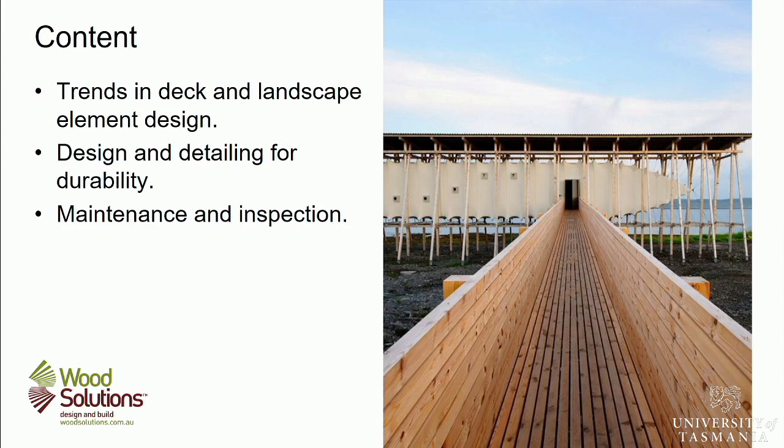On the outside, you then have this quite interesting installation put in right next to the ocean. It's a major landscape installation made with thin timbers, and it's again in quite an aggressive environment in terms of the fixings and fittings that have gone into the building.

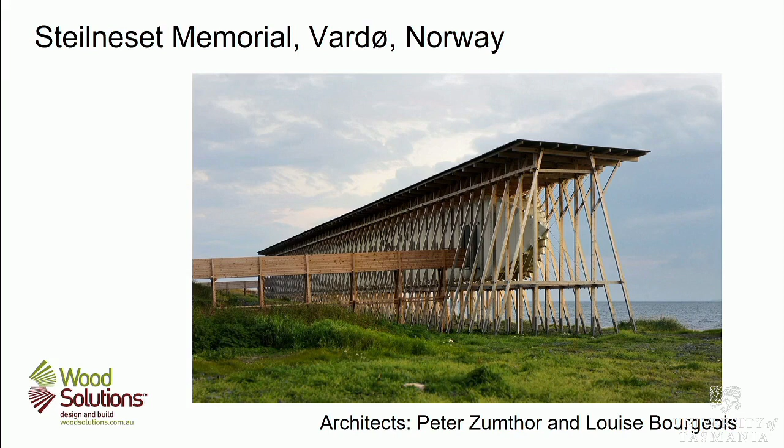They're proposing that the bay here be used for water sports. At the same time, they were encouraging people to re-adopt the old traditions of communal saunas rather than everyone separating and having individual saunas. I think there's some crazy statistic that there's one sauna for every 1.5 people in the country. So inside the building are some public saunas.

Outside of the building has then been converted into what is an outdoor grandstand for watching water sports in the future, plus an area for people to come. There's cafes there and walkways and promenades. Now, all of this is made out of the local softwoods, but it's all been heat treated.

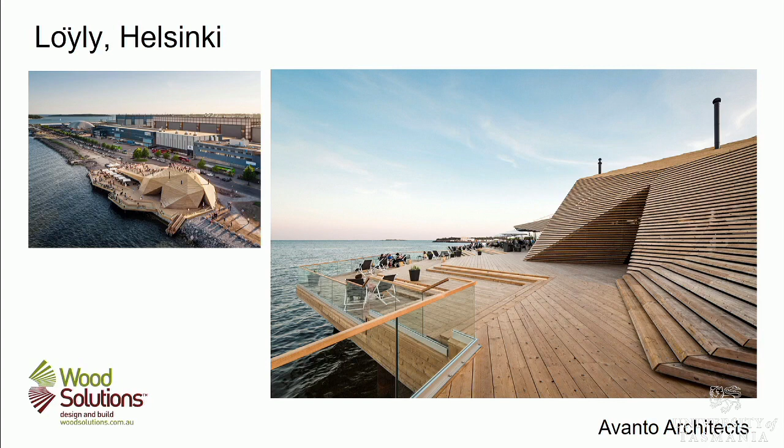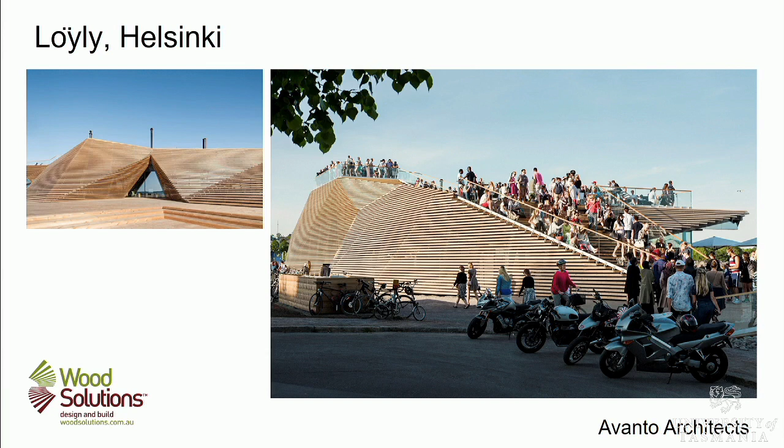I don't have pictures of the inside, but we do have some of the outside. This is it actually being used for a little festival, people sitting on it, using it as a recreational area on a warm day. It probably faces south so that it faces into the sun, and people go up there and sun themselves.

This is a much more robust US example of the change of an old industrial area into something more residential, allowing for greater interaction with the communities. This is an old industrial area in New York where a railway line and a road ran across in between the buildings. All of that's been decommissioned, and parts of it have been cut off so only certain sections now exist.

They've been converted into gardens and walks. In approaching the garden and walk, they've made a large timber ramp which takes you from street level up onto the railway level, and then provides a whole range of seating locations for people to rest as well as to enable people to get from the bottom to the top.

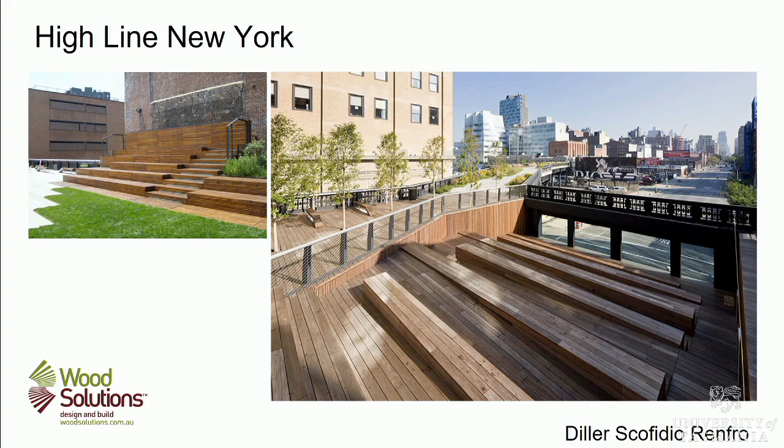You've also got deck areas which incorporate a whole range of seats, and it's worth having a look at those in detail. This is a combination of seats and lights effectively embedded into the deck. They come out of the deck, form a seat, there are lights underneath, and other services have been positioned under them, arranged as a sculptural object.

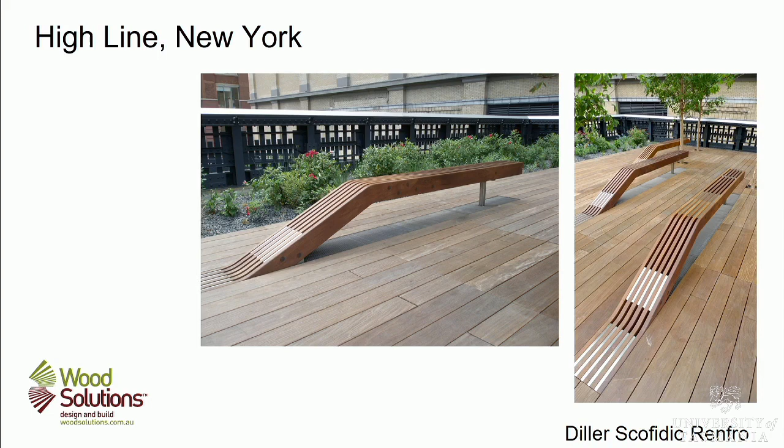This material is obviously all dry, milled board because it has nice clean edges and straight sides. If it was unseasoned material, it wouldn't look so nice and neat and clean and tidy. But they're really quite interesting little pieces - there's obviously services underneath the grids that they can use with the seats.

So if we look now at design and detailing for durability - if you want to start designing things like this, how do we approach it in Australia? The first thing is that anything we want to build is governed by the NCC, the National Construction Code, which governs the design of decks, balconies, and similar landscape structures. There are significant requirements for structural adequacy and provisions like handrails and safety on decks and balconies.

For commercial structures, it's AS 1720. For residential structures, it's designed to AS 1684. Any deck elements we want to talk about in terms of minimum element sizing come from these two codes. In a domestic situation, AS 1684 is where you look up minimum sizes for spans out of the tables, depending on the grade of timber and its treatment. For commercial structures, it needs to be calculated to satisfy the design loads of those structures.

One thing to notice is that the NCC's durability requirements are generally pretty low - they don't have a specific design service life for anything. There is a guidance document, now over 8 to 9 years old, which only gives guidance - it doesn't give you something specific to design to, nor does it prohibit certain practices which may not necessarily be sensible. There's also a whole range of various acts which influence access and equity requirements for people to get onto these facilities.

I want to look specifically at how you're actually going to design a timber one that's durable, to get it to perform over time by selecting the right materials, joining them the right way, and approaching the design in a particular manner. So there's a four-point program.

One is assess the hazard conditions. Then match timber and connections with the hazards for the required service life. Then design for performance and detail to minimise hazards, which means it lasts longer than bad design. And lastly, maintain the item.

Now, it's always embarrassing for me to see really nice timber put in a spot where you know it's going to only have a service life of a very short period of time because of bad design. Not because there's a problem with the wood per se, it's just either put in the wrong spot or used in the wrong way. That's the designer's fault, or the person who made the decision to put it there - it's not necessarily the wood's fault. If you make something out of radiata pine and put it outside, you can't be surprised if it breaks down in 3 or 4 years. It's going to happen, it's just the nature of the beast.

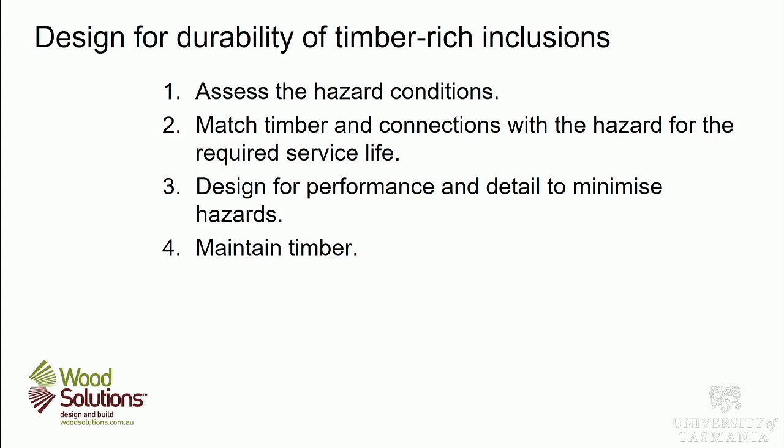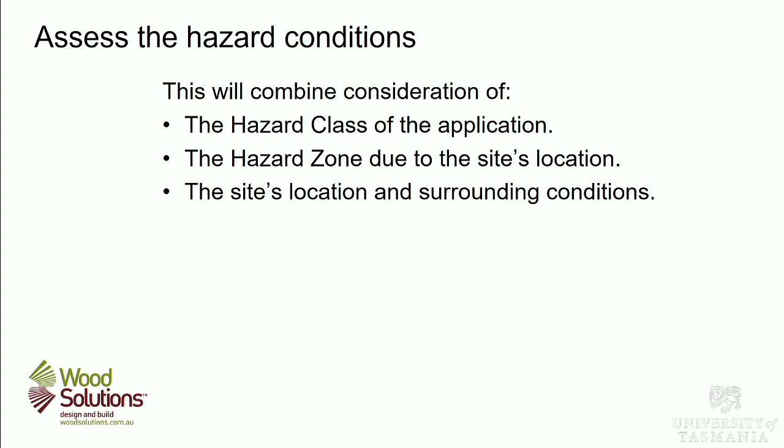Okay, so if we look at the hazard conditions - there's 3 sets of hazard conditions, things that influence what the actual hazard is. The first is the hazard class, a very broad brush approach to problems. The next is the hazard zone, which gives you a bit more discerning arrangement in terms of those hazards. And the next is the site's location and surrounding conditions.

So with wood design, there are 6 accepted hazard classes for applications. They range from H1, the least hazardous, through to H6, the most hazardous. H1 is like in here - these tables, the cladding, furniture, etc. H1 conditions, everything's away from moisture, it's got good airflow, it's unlikely to be a problem.

H2 is basically something that's protected from the weather but may actually be in a wall. So there may be moisture conditions that are going to influence it. There might also be termites and bugs that want to get into it.

H3 is outside above ground. So if we have a deck outside this wall and it's above the concrete, and we have cladding out here, then that's all in H3 conditions - that's what it's known as. H4 is in-ground contact. So if I had a deck out here and it was sitting on the concrete, the material sitting on the concrete is in a H4 condition, because there's water that comes up into it regularly and there's no ventilation around it.

H5 is in-ground contact where you've got extreme conditions or something that's really important. So if you've got a pole frame house, putting the poles down into the ground, that's a H5 condition - you don't want it to fail, so it's structurally important, and it's in the ground in an exposed location. H6 is then immersed in seawater.

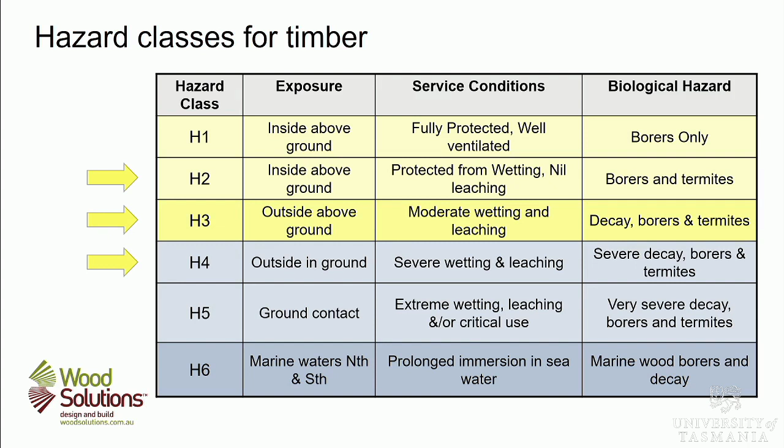So we're particularly looking at between H2 and H4 in this seminar - that's what we're going to find with decks and landscaping arrangements.

So how you differentiate these is - I haven't got a stick - up in here, H1. In the wall frame, on that back deck, H2. The deck's covered, completely covered by a roof, so it's technically H2. Here where it's exposed to the weather, it's H3. Generally you draw a 30-degree line from any shelter, and whatever's inside or outside that line is regarded as H3.

So the cladding on the outside of this is actually in a H2 condition. The cladding at the base of this one's in a H3 - so it will actually get quite completely different conditions. This is obviously in a H4. If we had one of these holding up a large portion of the building, then we'd class it as H5 and treat it accordingly, because it becomes a critical object.

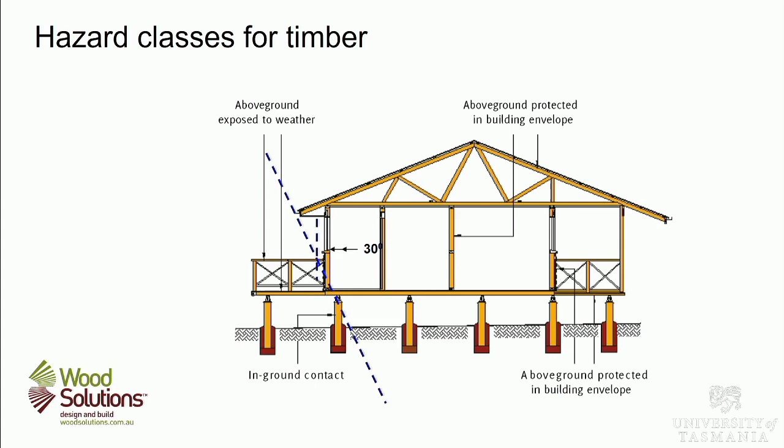So then we have hazard zones. We've dealt with hazard classes in terms of where things are in the building, but it does make a big difference about where the building is. Obviously design in Cairns is different than design in the inner parts of Australia or design in Hobart. Very different conditions in each of those three locations.

So in Hobart or Launceston, the two things we're concerned about: we're going to be quite susceptible to decay above ground, and we're not quite as badly off for decay in ground, but it's something we've got to be careful of at the same time.

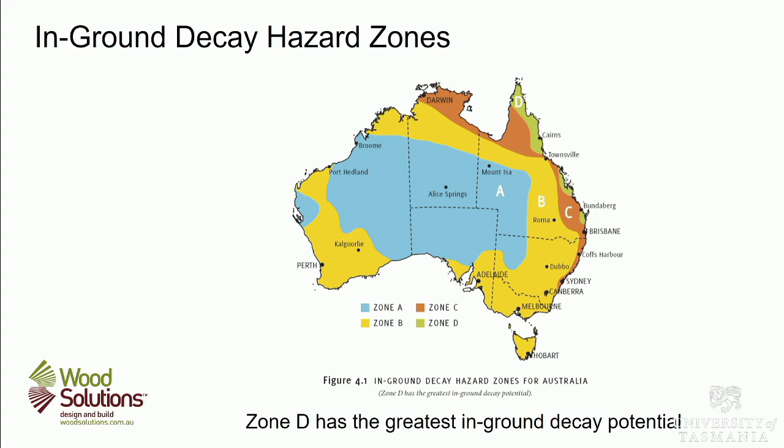There's also a whole range of factors about the building - where it is, what side of the hill it's on, etc. - which make a big difference. Anyone who's grown up in or lived around Tasmania knows that the north-facing slopes, or the south side of valleys, is generally a lot drier than the north faces of valleys, because the north side faces south and the south side faces north. So the north one gets the sun and is much drier than the other. A building on this side of the valley is going to be a lot damper than this one, and it's not going to get as much breeze possibly.

So what you'll find is that decay in this one could well be worse than that one, or decay on one side of a building will be higher than on the other side. Similarly, if you get a lot more sun on the north side, the timber on that side is going to weather a lot more than the timber on the other side. Weathering means all your finishes are going to break down faster, and the timber's going to check more on the surface than the other side.

What about prevailing wind and rain? It does make a difference, but it's basically the moisture you get in the surrounding atmosphere over time that matters. Fungi, which cause decay, need a moisture content in the wood of about 20%, and they need it regularly, otherwise they die off. So if you don't have moisture content over 20%, the fungi won't grow. If you only get it for one week a year, it's not going to decay something out.

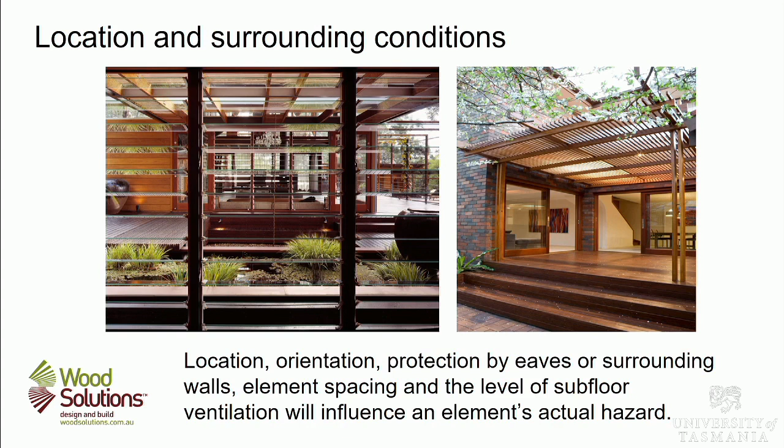This is probably, not so much that one, not so much this one, but certainly this one is the largest source of complaint and failure in decks in Sydney and Melbourne.

So people will want to make a deck, they'll see it on Better Homes and Gardens, here's a deck, this is what we've got to do. So they buy some pine, treated pine, it's got to be good. They pack it on the ground, they put it on some cement, level it all off. Then they will put another batten across, put boards over the top, and then wonder why in 5 years' time the thing starts to break through.

In part, the reason is they've made a swimming pool. And the swimming pool holds all the water in, and that then creates a perfect environment for fungi to grow.

So all of the guidance in Sydney and Melbourne that they give out at the hardware stores is get it up off the ground, get it so that it ventilates. Even to the case where you dig down and make an airspace around the side and leave a space between the ground and drain it properly, if you want to get it right.

But that's obviously a problem, and this is obviously an issue with any timber structure, because all that, as you can see, is leading to decay there at the bottom. So the decay stops once you get that far away, though you might get mould on the surface, but the full decay will stop once you get it dry.

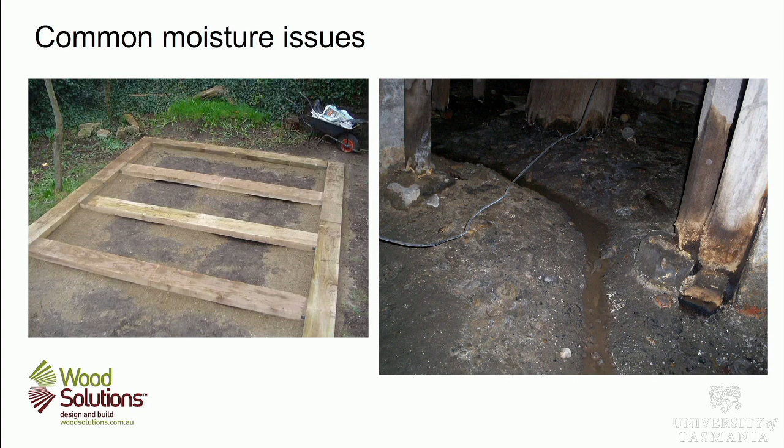Okay, so matching the hazard, matching the timber and the connections with the hazard is in your next deal. So there's a couple of things you've got to consider. One is the natural durability of the heartwood and the material, the treatment of the sapwood, and the selection of durable connections and fixings. Now, I'll just explain what the difference between heartwood and sapwood is.

When a tree grows, it grows generally as a circle in plan, and the outside bit is living cells, and they transport water and nutrients from the leaves to the roots and back again. Okay, so it's a band of certain width. It varies. In hardwoods it's quite small, in pines it's quite big.

Now, as it's moving those sugars and fluids up and down, it's got lots of starches in it. It's also, the cell structures are quite open because you want to move fluid up and down. So that stuff's called sapwood.

The stuff called heartwood is the bit the tree doesn't need anymore to move fluids up and down, and it's the bit in the middle. So the tree pumps waste products from photosynthesis into those cells to toughen them up.

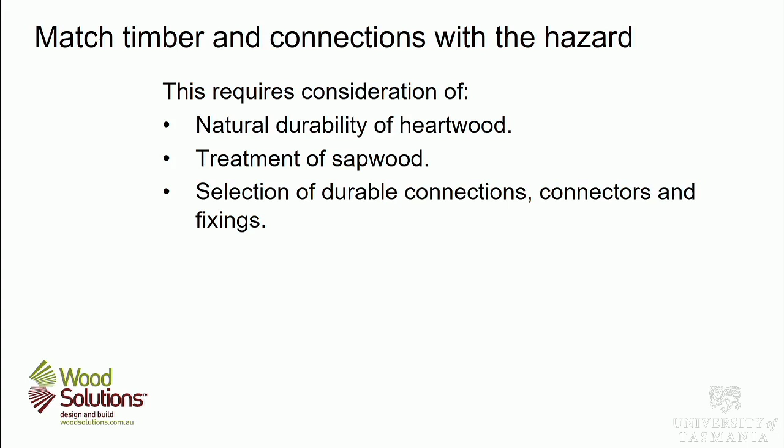Timber resists hazards through its natural durability, and that varies with species. It's a characteristic of the genetics of the tree as to how durable the wood is. Age also plays a part, so the wood from an older tree is likely to be more durable than from a younger tree, even though it's heartwood. Though no one's done the tests, it's just a suspicion.

The difference in durability between heartwood and sapwood is actually quite significant. Also, the structure of the cells makes a difference, because certain bugs like the cells in particular timbers and can't lay their eggs in other timbers. Hardwoods have a large cell called a vessel cell, and our southern hardwoods tend to have big vessel cells. There's a moth that has evolved to lay its egg in those cells, and the larvae grows and eats the sapwood around those pieces. It can't do this with some other species.

All the performance results are listed in this standard, and they're all listed on the Wood Solutions website. So if you want to look up durability, it's on the Wood Solutions site.

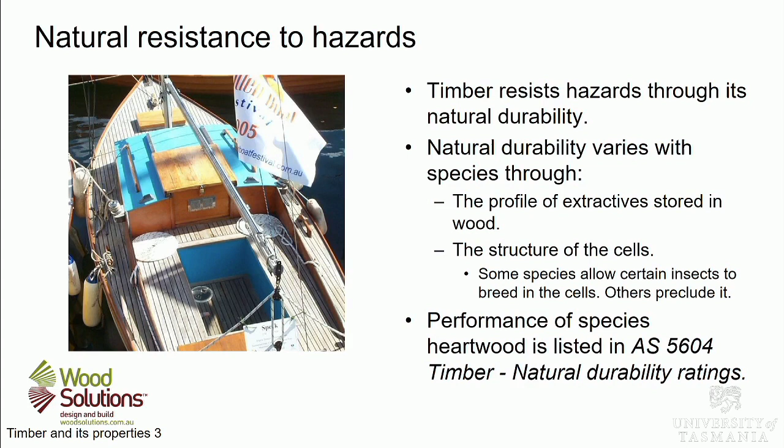Durability is given for in-ground contact, meaning buried, and also outside above ground. This is the result of long tests over 30 to 50 years.

Things are then graded on a 1 to 4 scale, 1 being the best, 4 being the worst. So 1 is highly durable, 2 is durable, 3 is moderately durable, and 4 is low durability. This chart is from research papers giving results of tests from a test site in Sydney of species that are class 1, class 2, class 3 — class 1 being the flattest, lasting the longest with the least decay, up to class 4, which has the most decay in the shortest period of time. So the variability is quite significant.

All sapwoods are class 4.

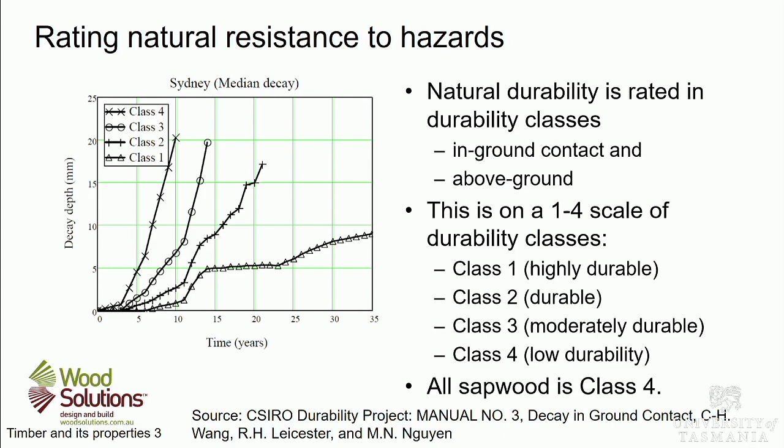This gives you a table of life expectancy for each of those material classes, depending on where you put it. If you've got in-ground, which is an H5 condition, with durability class 1 material, you're expecting greater than 25 years, and it might be significantly longer. Coming down to class 4, you've got between 0 and 5 years in-ground in an H5 condition.

Outside on a deck, you might get 7 years from something that fits this category, such as Vic Ash, or even most Tas oak species, which will only last 7 to 10 years outside. Even in a deck, you'll find that they'll start to decay away. And it will increase up from there.

We did a big project down at the Huon, the Geeveston Forest and Heritage Centre, when I first moved to the state. One thing we did was put in celery top pine mileposts along the Arve Road out towards Tahune. I didn't know much about wood at that stage, having come from Sydney where such things aren't discussed.

The local foresters said, look, we need to sap these things, we need to sap the celery top poles. I said, all right, I wasn't going to argue with them — they were going to do it anyway. So they sapped them, cutting the sap off with axes and adzes, then shaped the signposts and put them along the Arve Road.

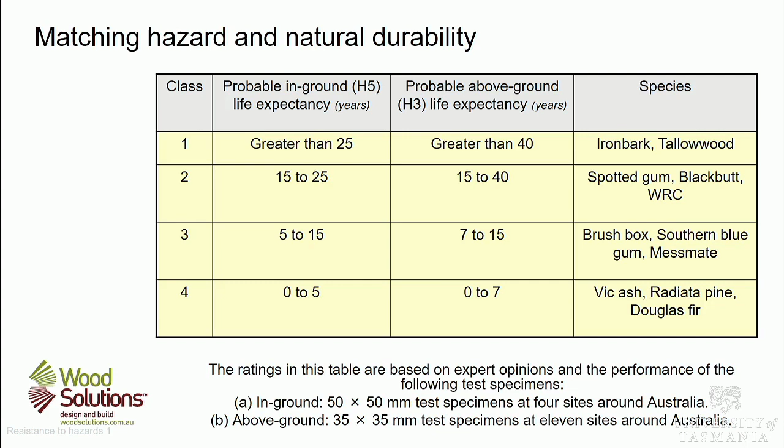If you take the sapwood off, they cannot attack just the heartwood and establish. I'm only mentioning that because A, it shows me in a good light, but B, timber species are really variable in how they perform, and there's a lot of local knowledge that goes along with these things. Different species perform differently, but if you put a piece of sapwood and heartwood out at the same time, decay in one will lead to more rapid decay in the other.

With celery top, can you distinguish between the sapwood and heartwood easily? Yeah, there's a slightly different tone to them. The sapwood is a paler colour, and the inside is slightly more honey coloured.

So with a post you can tell, but in sawn timber I can't tell you if you can. Most sawn timber doesn't actually end up in a deck. It'll end up as painted siding, cladding, or furniture. So celery top is quite hard to lay your hands on now.

This gives you an example of a deck that's probably of a durable species, but you can see here where decay is starting on the corner of the board, and that's due to that being sapwood, while the rest of it's probably heartwood.

We can have that argument later about whether it's upside down - groove up, groove down.

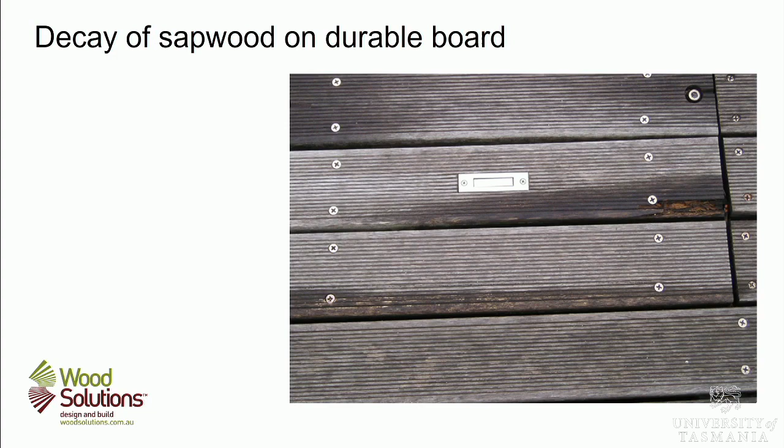I've seen quite a number of cases - there's big decks in Launceston, public decks, where they've specified species, and you'll have a whole line on the edges of boards where it's all decayed away and the other side hasn't. So it can be quite a prominent thing.

One thing you can do with species that are not very durable is treat them. Treating introduces chemicals either onto or into the wood, making it unappetizing for fungi as food. On the mainland you've got to talk about fungi and termites, but here we don't have them yet, so we don't necessarily bring that up. I think they'll come with a fruit fly.

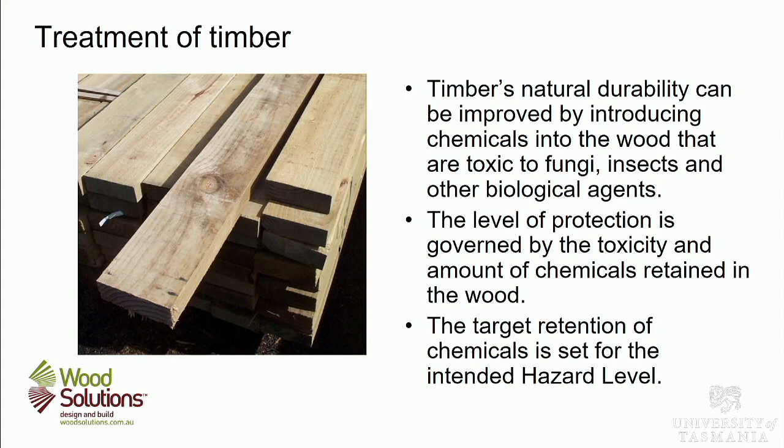With treatment, the level is targeted at the hazard class. So if something's treated to H4, that's the situation it's treated to go into. An H4 treatment means it's suitable for an H4 application or less. If you buy H3 treated material and put it in an H4 condition, it's not going to last very long because it doesn't have enough chemical in there to keep the fungi out, given you've put it in a really nice place to grow. So when you specify, you need to make sure you're specifying the right hazard class material, or checking what you're buying at the hardware store matches.

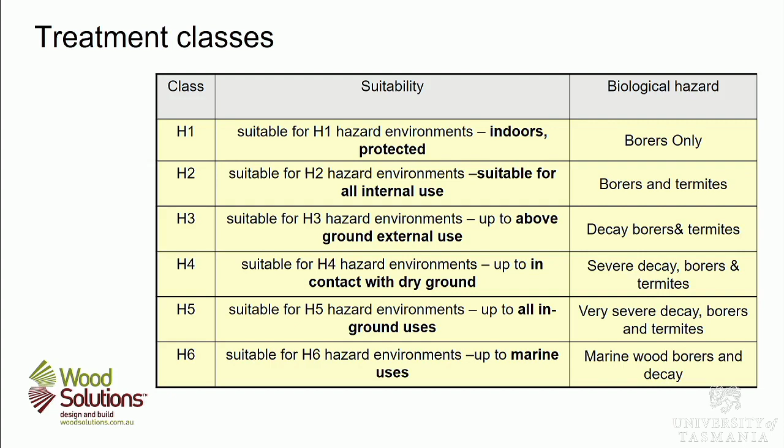There is no direct connection between a durability class and a treatment hazard class. Durability class exists independently of the hazard class of treatment - I'll come back to that, because you can't treat the heartwood of material reliably, or at least you haven't been able to up till now. Some people believe now that you can, that there are certain products developed that will take the treatment into the wood. Others believe that's all just marketing. We don't quite know yet - there hasn't been enough work done.

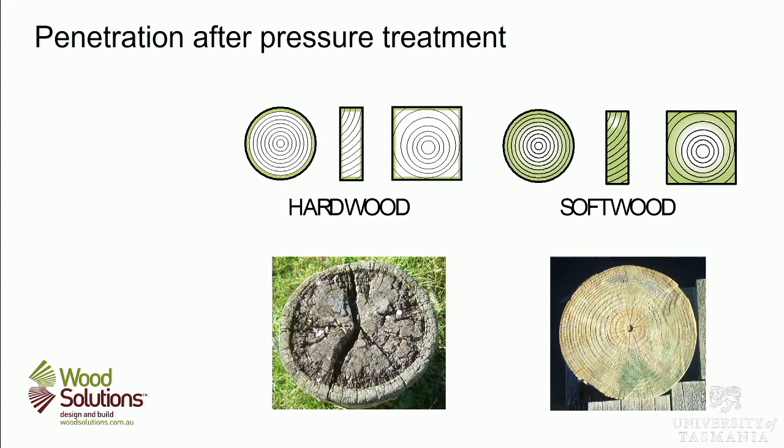So, okay, I think we won't deal with that.

If we're looking at timber outside, for a highly durable case, we're looking for something with a durability class 1 or 2. I'm talking about decks now, outside in the sun, flat, where you're going to get a lot of water. You're looking at durability class 1 or 2 material.

So that's one. The other is silvertop ash, which is Eucalyptus sieberi, only available from the northeast - that's the only place it grows. There are some smaller millers up there who will cut and supply it. If you want to see what it looks like, the deck over here in Sullivan's Cove near the old heritage crane is all done in sieberi. The decking is sieberi.

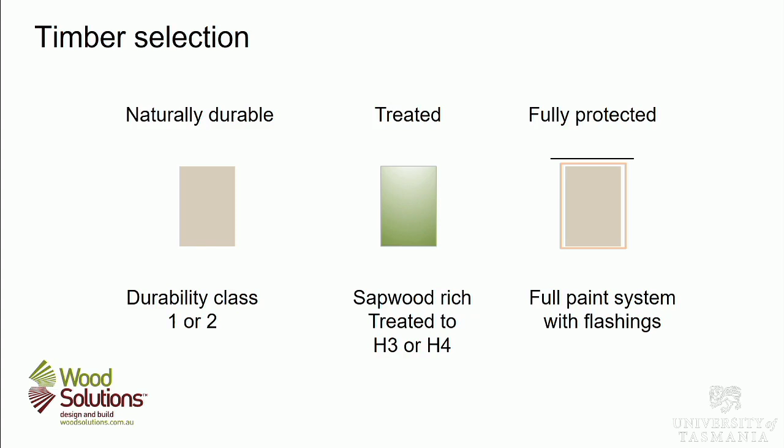The last option is a full paint system with flashing. I've put that in because I've seen the Europeans doing it - this is an example of decks prefabricated by a company in Germany with spruce, where each element is completely coated with paint first, then assembled, and sheet metal flashing is put over the top, adhered onto the timber in locations. The decking then goes on top and is clipped in. After installation it gets a top coat of paint, so it's fully protected from the weather as long as the paint coating stays in place. There are a lot of verandas in Hobart and Launceston that are fully painted and are actually in reasonable condition if they've been continually painted for the life of the building.

It's not... this may not be an acceptable solution, but you can only do that if the client agrees to it as a performance solution.

All right, if we look at that, all right, I'm happy to have a chat about that one.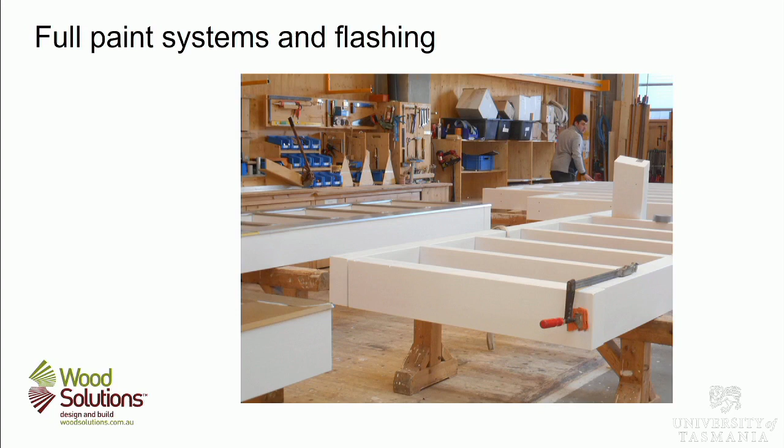So the next item we're after then is durable connectors and fixings. This requires consideration of potential corrosion when it's embedded in the timber, corrosion due to atmosphere, the material used in or protecting the connector and fixing, and the behaviour of the fixing in the timber.

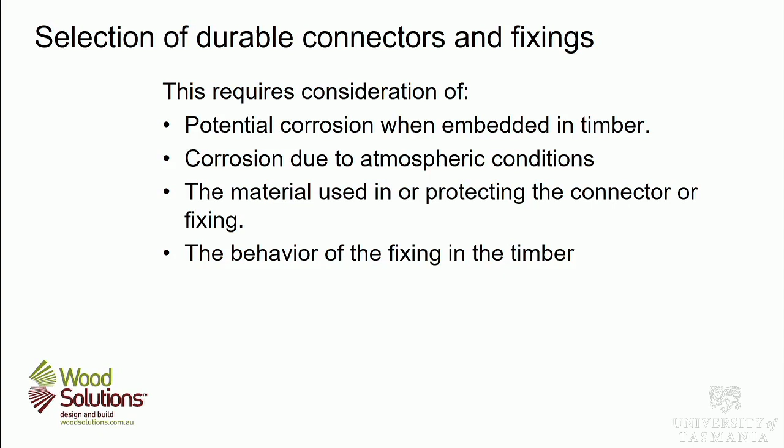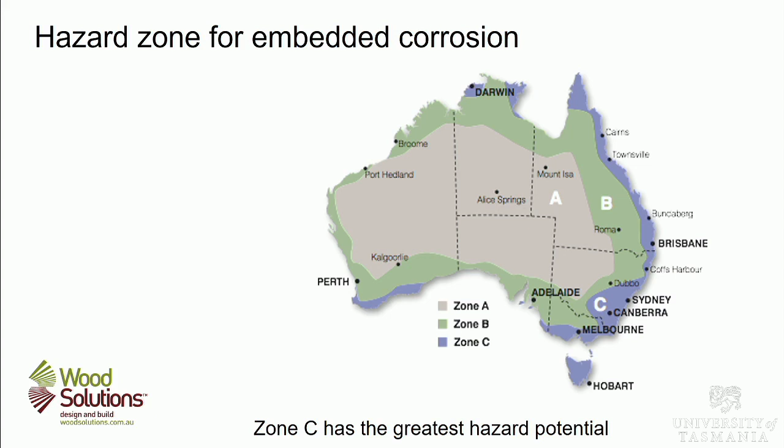So Design Guide 5 looks at hazard zones for material that's embedded in the wood, and in Tasmania we're in the most hazard-prone zone. Stuff in the wood will corrode more regularly here than it will in parts of the Northern Territory. There's also coastal zones that lead to corrosion due to airborne salts, and again, we're in the most hazard zone. So this zone E is the most hazardous for this condition.

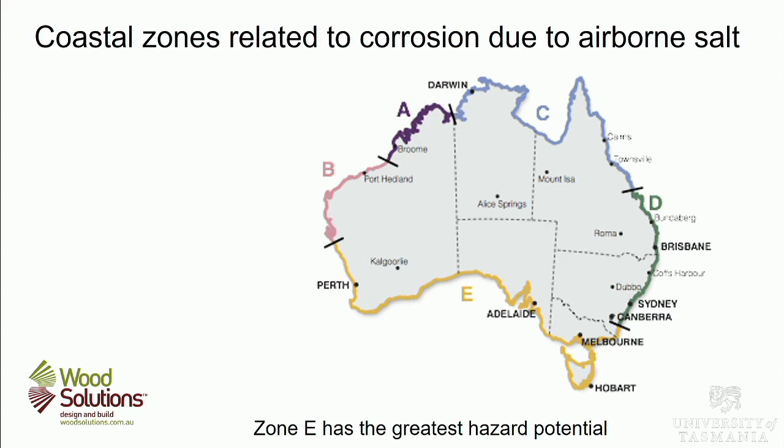So in the guide, there's this table, which I'm not going to go through in detail, except to say that if you're in a condition close to water, you'll want to go, if you can, to a stainless steel solution.

If you're further away from the water, a hot dip galvanised or mechanically plated material may be adequate. Something that is a sheet metal piece made by Pryda with a coating on the outside is not going to do in a situation where you're close to the water. It will not last, and it will corrode away quite quickly. You will need better material and better conditions than that. These plated products and mild steel products are really only for indoor uses.

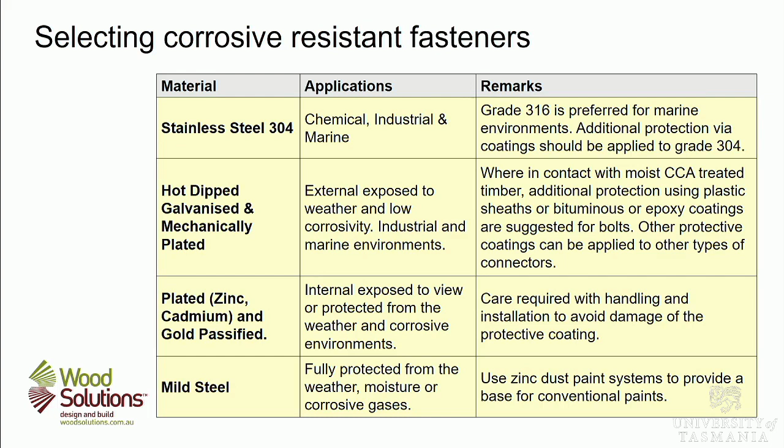So this gives you an indicator of fastener performance. Here's a veranda with standard sheet metal connectors nailed onto the edge, they're all corroding out.

I had one of the people who came to the seminar last night mention an inspection of a veranda near the water up on the Tamar, where all of the connectors holding the joist to the building were rotting out, all corroding, just like this. So those sorts of things either have got to be avoided, or if you see them, they need to be replaced. This is a condition where you've got nails being pulled out of bits of wood.

Most of you will have seen this at some point or other. Basically it occurs because you've got a board that will be dry. When it dries, it shrinks. When it gets wet, the timber expands. It expands first at the top the most, grips the nail, and as it grows in height, it pulls the nail up with it. Then when it dries, it lets it go. It basically progresses that way unless the nail is spiraled and well put into the wood. So you will see cases where nails get pulled out like that.

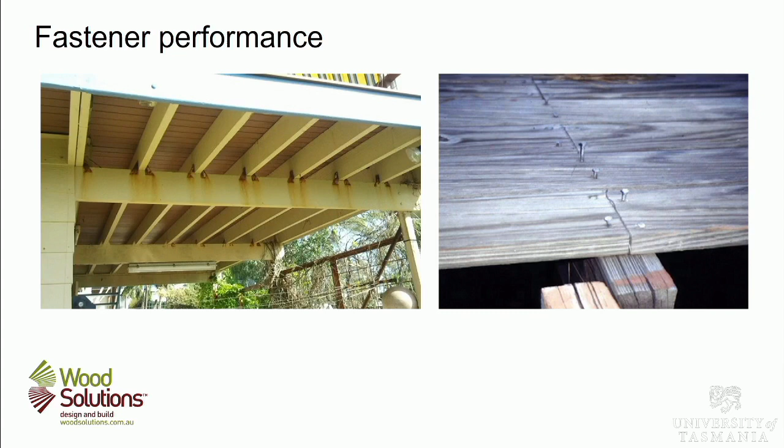The same thing happens with nail plates if you've got a truss that's outside and exposed to the weather. Even if the nail plate is protected, you'll find that the nail plates will pull themselves out over time. So they also need to be fixed off with some screws to hold them in place and stop them being pulled out.

Okay, design performance to minimise hazards. A couple of things here: we want to design for a compliant, robust performance, we want to detail it to reduce the impacts of moisture, we want to understand what happens when it gets in sunlight -- I'll deal with that more in the next seminar, which is on weathering -- and you want to protect from termites, which is something we don't have here yet.

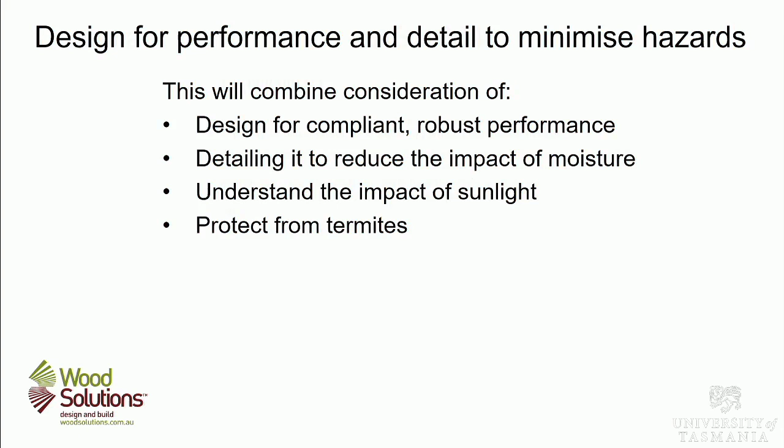So this is the durability requirements in AS 1684, where structural timber members in ground contact or not protected from weather exposure and associated moisture should be class 1 or 2 as appropriate, or should be adequately treated.

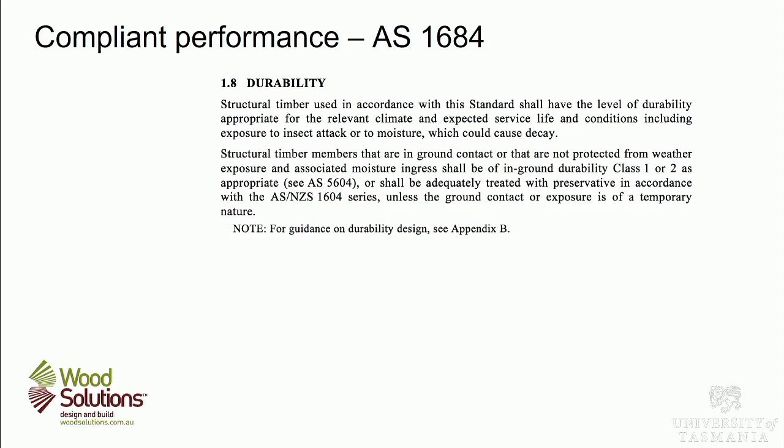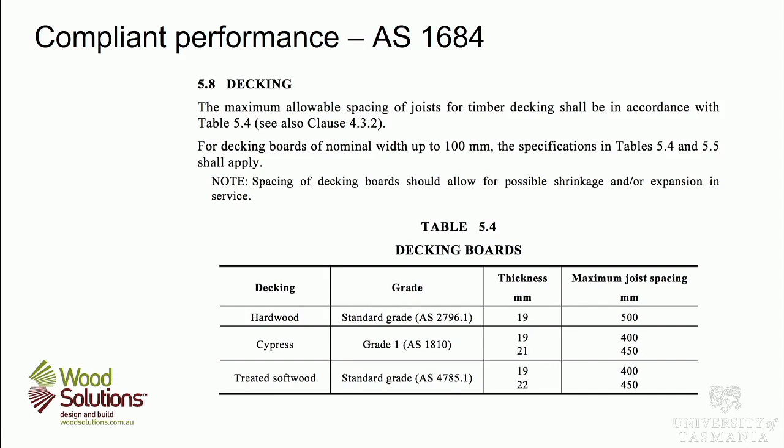There are requirements then for grade in terms of span of the decking members, and of course this is only for domestic or residential buildings. They're graded by a visual appearance grade, which deals with the straightness of grain at the same time, so that's notionally allocated a structural grade, because most people will buy the stuff as an appearance grade.

And there are specific requirements then for the ways in which the material is fixed. In AS 1684, all of it for decks covers about 5 pages, of which these tables are most of it.

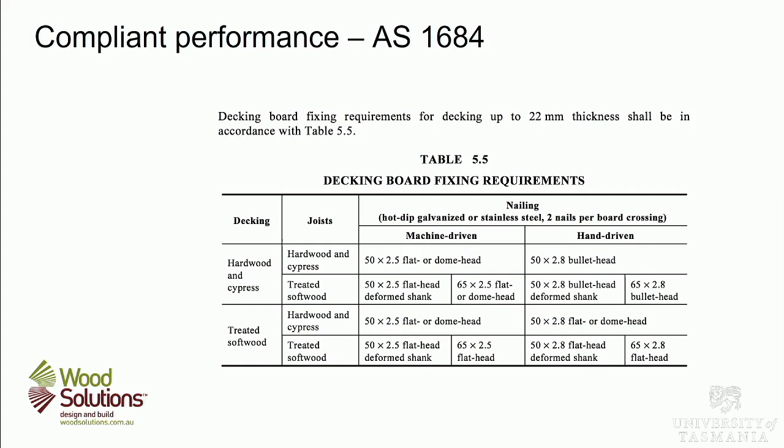One thing about the NCC is it establishes loads for decks and balconies, which is usually 2 kilopascals, per AS 1684. A lot of decks will then carry additional load that may not be apparent when first designed, such as pot plants, water features, furniture and the like, which adds a lot of load. One thing that's consistent with a lot of deck failures is that decks are carrying far more than the initial design load.

There's a case in New Zealand where there was a major fireworks display. Something like 16 people came out on a deck not much bigger than 3 or 4 times the size of this table. They were all out watching the fireworks, and the whole thing fell off the building. In that case, it was excessively loaded, but people do that - they don't necessarily think of it when they're all coming out to watch a fireworks display.

Robust design allowances are warranted. Conservative oversizing of elements is probably a good approach - don't look at what AS 1684 says is the minimum, go up a size. Look at very positive bearing of elements, and also quite robust connections.

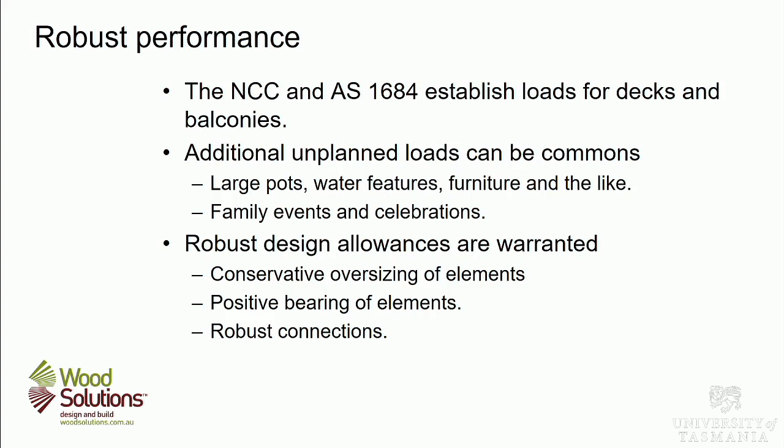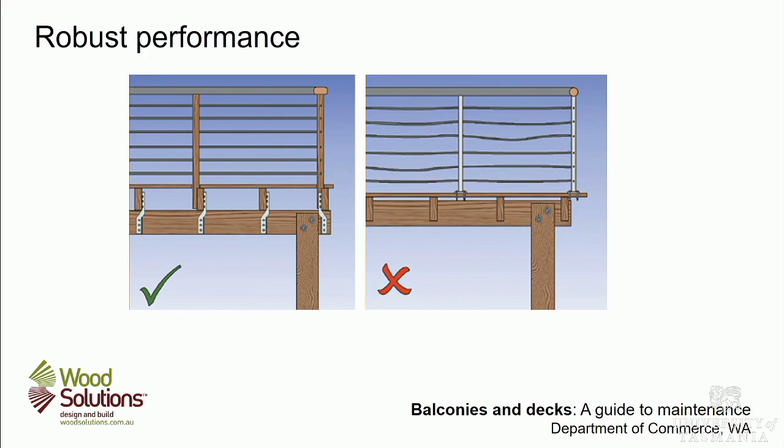In one of these guides prepared for various state governments, probably the West Australian one is the best illustrated. This looks at robust performance in terms of fixing, sizing, and connecting handrails to major elements, not just to the deck, where things are likely to move and load paths are too erratic, so that handrails can't shift and will perform well over time. It recommends cleats like this, and not nailing it on the side or housing.

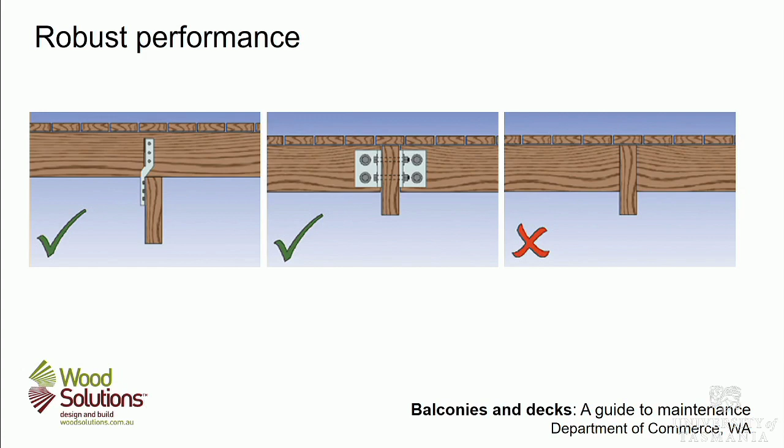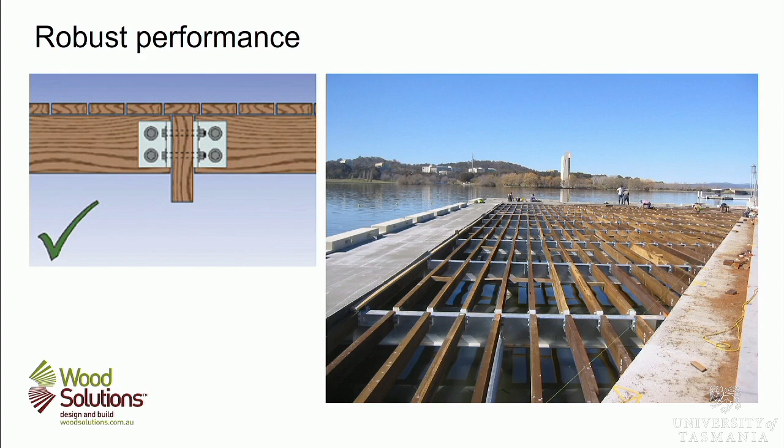When you detail, you want to keep the timber dry if you can, by using a roof or an eave. You want to exclude or shed water, and then ensure the wood can dry out if it gets wet. So the amount of water trapped into the surfaces, into the connections, is something you want to minimise as much as possible.

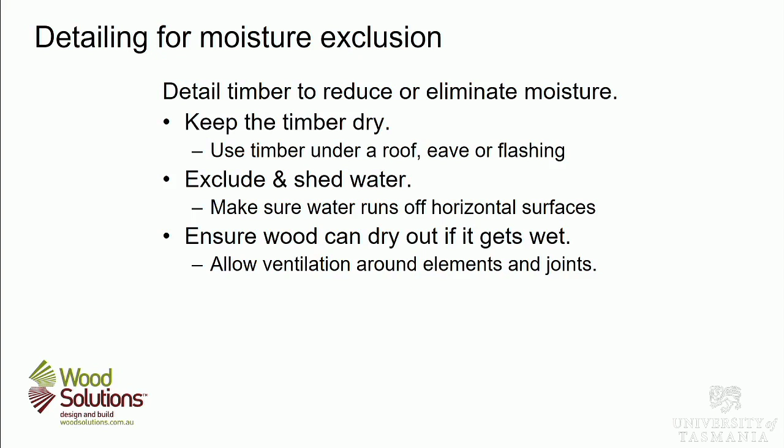This is a detail out of the guide, from a Queensland example, where you've got a bearer, a light flashing material underneath, and decking boards put on top. You don't want to use a bitumen coating because it won't allow the timber to breathe out moisture if it comes in through the top. A looser material like this will give you better performance.

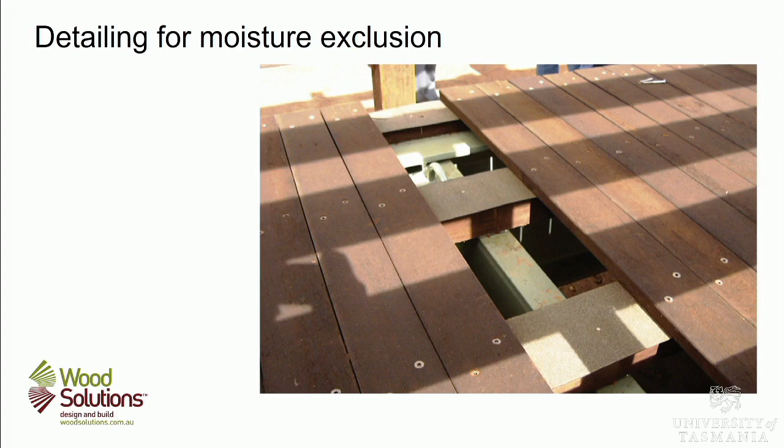You want to get stuff out of the ground as much as you can, to ensure good air movement through positions, particularly near the ground.

Also, if you can detail it so that the cladding of the building goes past the deck - the deck sits slightly spaced out from that cladding and fixed back into a support structure behind - then water can't get down into the building, and can get past between the deck and the cladding.

There's a number of instances you'll see later in the guidance, where the checklist is always to check whether the deck has been built and the cladding built over the top of it, because that creates a spot for water to be redirected back into the middle where you can't inspect it or see what's going on. Those fixings are often where you'll see these decks come away.

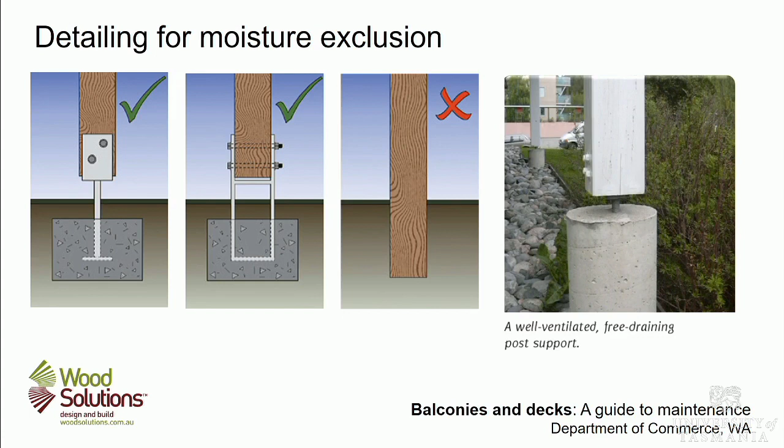Some more detailing: top caps, details that allow handrails to meet balusters with airspace between and solid fixing locations, or there's a pretty rudimentary cut across the top and a clear finish put on to protect the end grain.

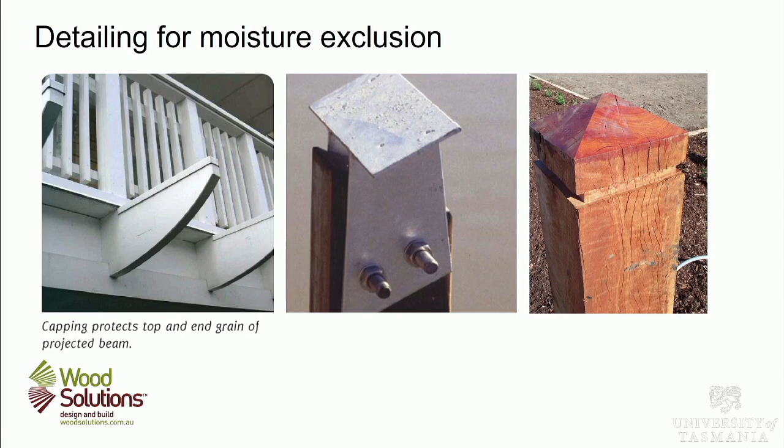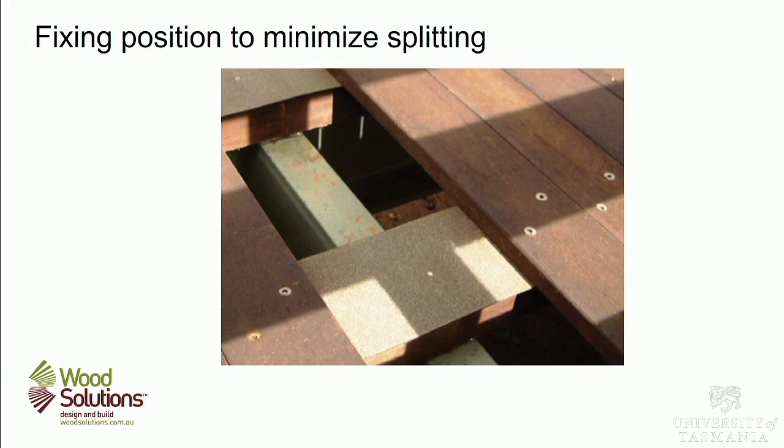I brought this one back to highlight that the fixings on this are not in line, they're spaced across the piece. Because they're spaced across the piece, the likelihood of the piece splitting along the line where the nails or fixings are put is reduced, so you're not making a split through which water can get down. So the fixings offset means you don't encourage that split along the wood.

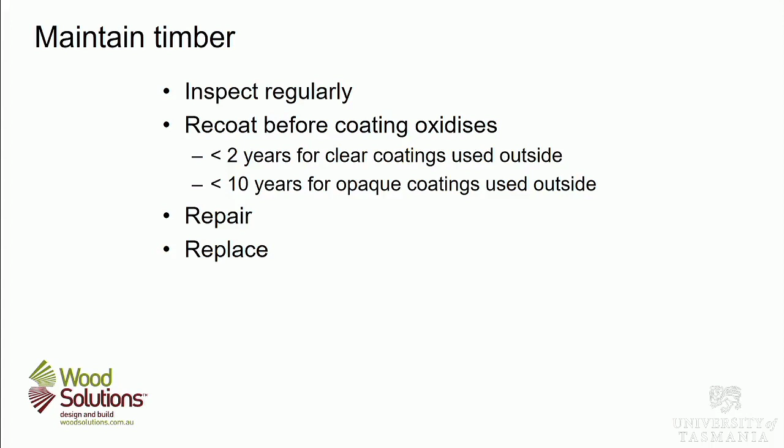Repair and replace. Now, when we first started to put together the information for this seminar, one of the key things we came up with was this whole issue of deck failures.

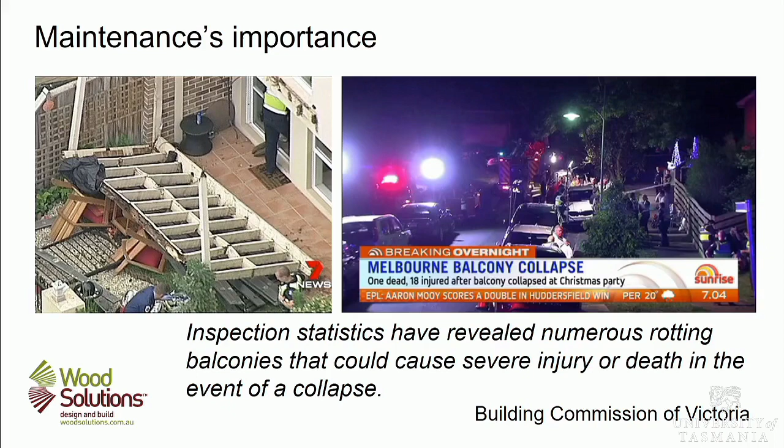There's a news report from the Building Commission about inspections saying there are numerous rotting balconies that could cause severe injuries. And here's one example of a deck that's collapsed. You've got rot in the posts, and the material also pulling away from the side of the building.

This is another one, from a coroner's report in Queensland, where a woman in a house probably built in the 1920s had something like 25 of her friends over, all parents of kids going to a particular school, the kids graduating from that primary school. Had them all over for morning tea to celebrate this.

They all move out onto the deck. The beam at the front moves marginally. The only connection between the joists and the beam at the front were nails from back in 1920. Water goes in, the nails corrode away. So the beam is slowly working its way out, and when all these people come out onto the deck all at once, the deck collapses and there are 2 deaths.

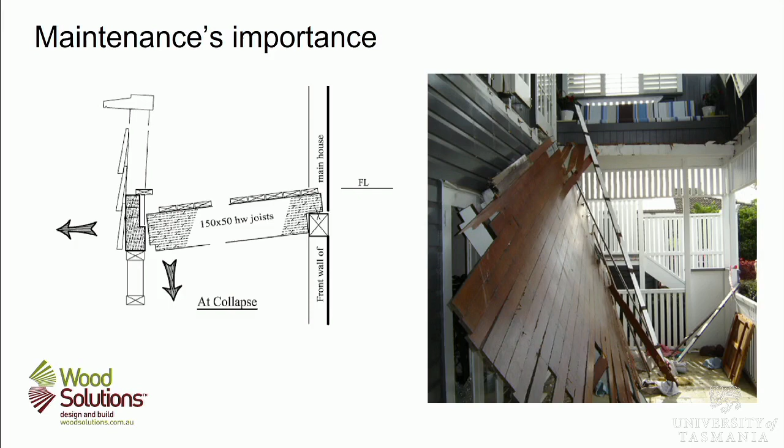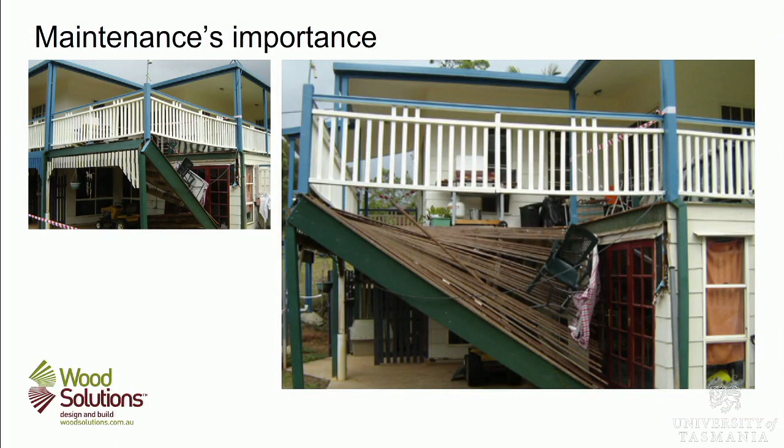All the state governments have been looking to ways in which they can increase understanding of this. So here are some observed problems that have been listed.

One is pooling of water on the balconies or the deck surface. Balustrades that are fixed to the balcony or deck's top surface and not fixed directly to the structure, and of course that's leading to wire balusters becoming loose because the deck moves and can't resist the strain going onto those handrails.

The tops of solid balusters and balustrades fixed at wall junctions can be loose or inadequate so that the handrail comes off the side. Cladding that finishes hard against the balcony or deck contributes to wet rot, where the cladding comes down onto the deck and its support and directs water into that connection on a regular basis, leading to rot in the timber and additional corrosion of the fixings.

As I mentioned earlier, if you can get a space between the cladding going all the way through, and then a space, even just 5 or 6 millimetres, between the supporting element, you have an air path through there and the cladding runs past. This ensures everything gets a bit of air through it and can be inspected properly. Cladding and lining boards preventing visual inspection is another issue, so you can't see the problem until things break.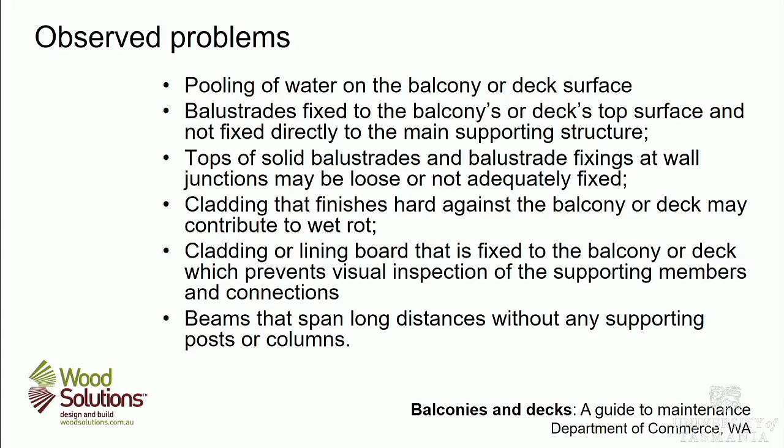It reduces ventilation, as well as overloading that particular location. So if you notice large extra loads going onto things, particularly on a renovation project or if you've been asked to do an inspection, these are the things you need to look for.

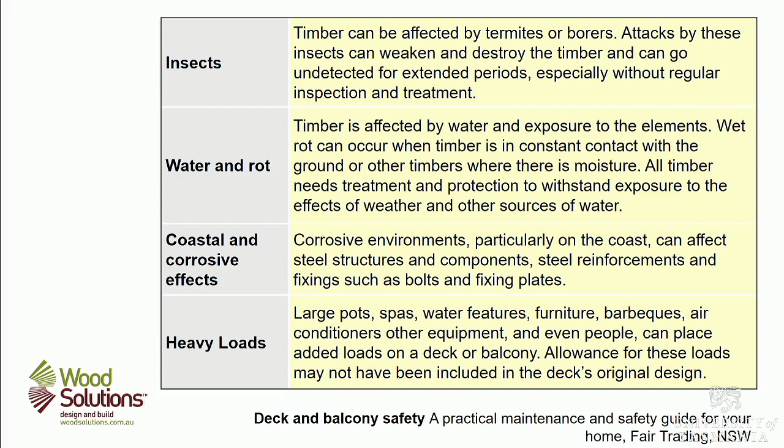There was a question in the break about another undesirable detail, very common in 1960s, 70s and 80s buildings, particularly 60s and 70s: making the floor beams, the large floor joists, span out and form the deck. Very common in Sydney, and in parts of Tasmania too, where people would have a hardwood joist extended out, say 300mm, and span it out 900 to form a deck at the same time.

The thing with all of those is that the outside pieces rot away and that brings moisture inside the building. It means your joists go, as well as the deck itself starting to rot out. So if you see applications like that, there's very little you can do outside of putting a completely impervious deck over the top to make it watershed.

So you basically bring those beams inside, or cut them off if they're badly damaged already. You cut them off and build a new deck that's structurally separate from the existing structure, because otherwise they'll lead to the whole building becoming unserviceable.

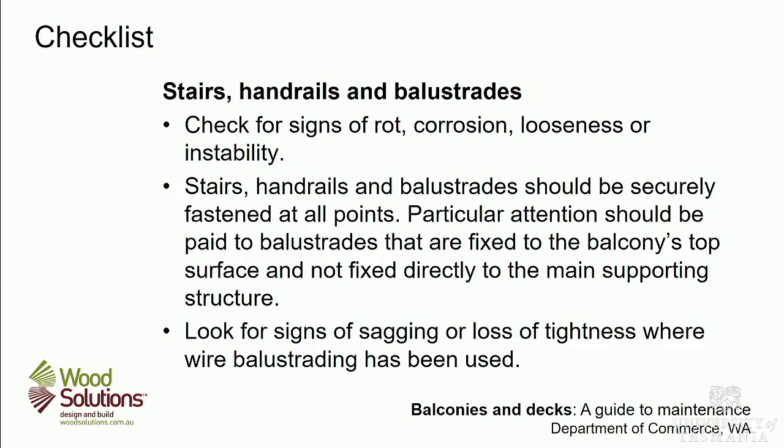For stairs and handrails, you want to check for signs of rot, corrosion, looseness. Check that stairs and balustrades are securely fixed, and look for signs of sagging or loss of tightness. The thing about elements being fully bearing and secured is something regularly emphasized in all these guides, so that you have solid bearing one on the other. Check for signs of decay, rot and insect attack.

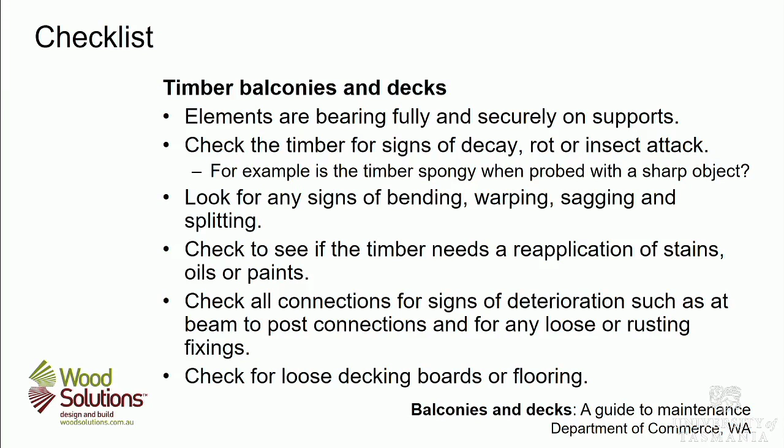I don't know if I've got much more. No, I haven't. So, we may not have needed a break. We did.